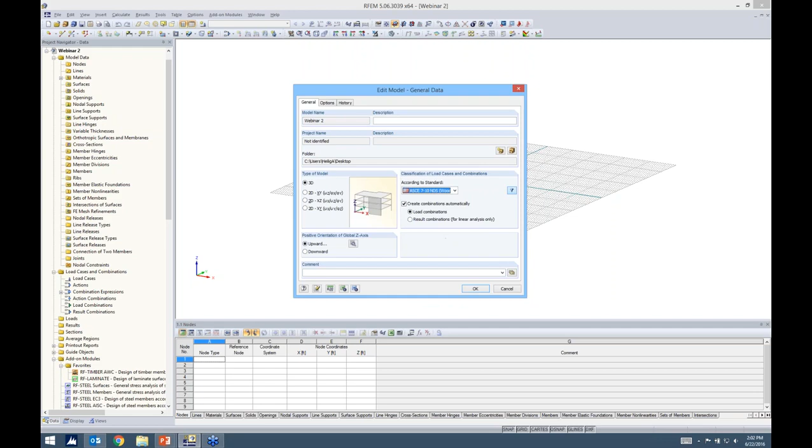So when you launch RFEM, this is the dialog box that you'll receive, and you just simply need to go ahead and give your model a name and define the type of model, 3D, with the orientation of the z-axis upward. For our load combinations, we actually have in here ASCE 7 for 2010, the NDS wood load combinations. I check the checkbox to create these automatically, then we simply click OK.

So some of you are familiar with RFEM, but for those of you who aren't, this essentially is the program. We have the tables for data input as well as our results down here at the bottom. We have our project navigator over here on the left, which can also be used for data input. We have our display tab down here, which is basically what controls everything in our view window here.

We have views, which we'll be using today, and then once we run our results, we should get another tab down here that says results. And then, of course, we have all of our toolbars at the top for our modeling purposes as well.

So we want to begin today with our walls, and typically with walls, we would want to go ahead and model them in this vertical direction. What I find actually easiest is to use line elements to begin with, and up here we just go ahead and choose new line in the toolbar, and you'll hear me say this quite often. We have a lot of AutoCAD-like features, which I think is one of the more powerful capabilities in RFEM.

So not a lot of time will be spent trying to create very complex geometries because we have all these capabilities within the program itself, such as splines, polylines, arcs. So you can see for line options, we have the typical straight line, but we can, of course, choose any one of these. For our application, we'll just go ahead with a single straight line.

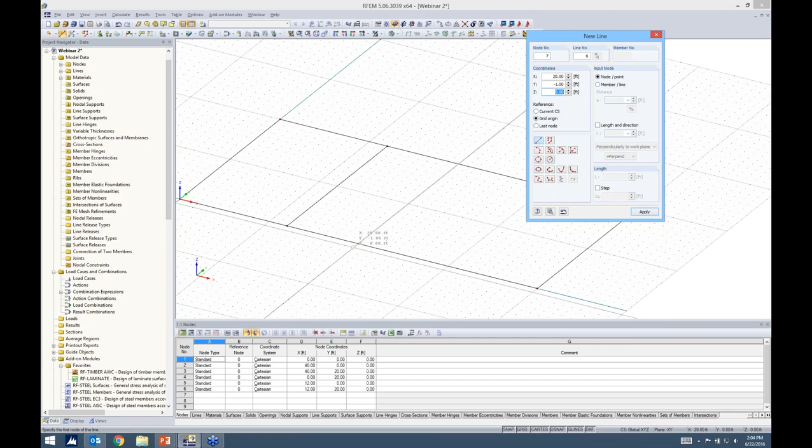Now, all I'm doing is just using my drawing grid to draw a 40 by 20 outline of my building here. And you'll notice that I just snapped to the different points, and I'm going to add an intermediate wall, maybe right here at 12, and one more at 20. So we have nothing more than just these 1D line elements here.

And what I can do is I can just select them, and I can right click, and under line I can go ahead and extrude the line into the surface. Something to note here, these are going to be cross-laminated timber panels. So cross-laminated timber is not available in RFEM. In order to define all of those different layers and properties, we have to use our RF-LAMINATE module, which we'll be spending some time in a little bit later today.

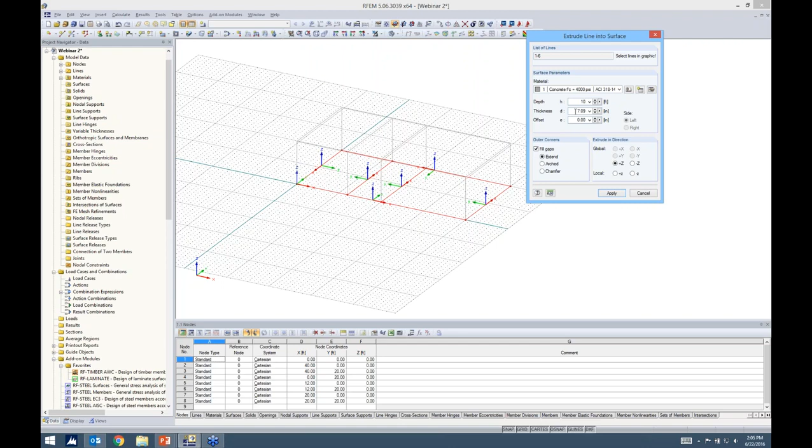So it's worth noting that the material here for our panels doesn't matter. We can just go ahead and choose something very general, such as concrete or steel, because all of this is going to be overwritten later by the add-on module RF-LAMINATE. So for now, concrete is fine. I want a height of 10 feet. The thickness doesn't matter either, that will be overwritten as well. So I hit apply, and now we can see that our walls are quickly generated.

Maybe we want to add some openings in these walls, and for this I'm going to go ahead and change my work plane. You'll notice that work plane is just on this front wall of this structure. Work planes are important because when we continue modeling, the work plane confines exactly where you're drawing your elements, so I don't have to worry about drawing out in space or accidentally drawing on the back wall. I'll be drawing where this work plane is set.

As far as openings, our other toolbar up here has all the different openings. Again, we have the typical rectangular opening, but we have all of these other options. This can be super powerful when you're doing finite element modeling, or maybe you have a structure with some odd geometry for different openings in a slab or a wall. You can see here ellipses, polygons, anything you can think of.

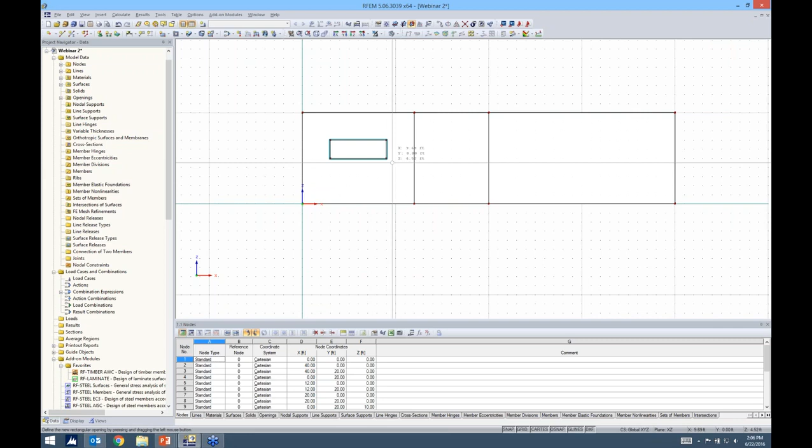For us, we'll go ahead and stick with a rectangular opening, and basically I'm just going to draw some windows here, nothing too complex. Maybe we want to draw a door opening here, and lastly a window over here.

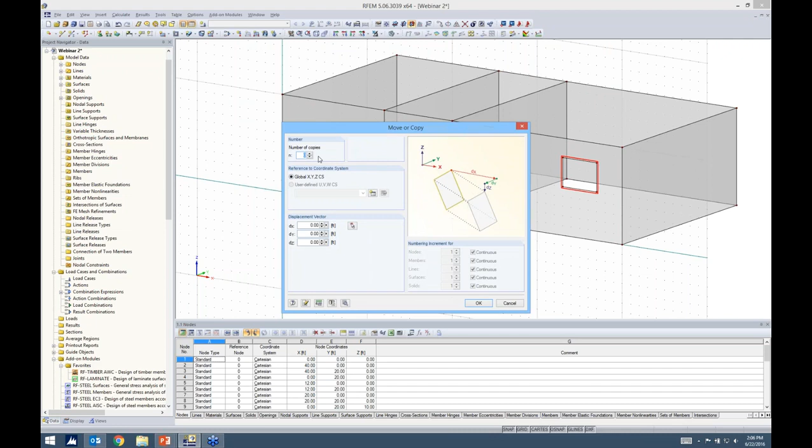Now, as far as the windows for the back wall, I can just go ahead and hold down my control key to select these openings. I'm going to use my move tool, and create one copy and move it back 20 feet in the Y direction. You'll notice I'm going through modeling maybe a little bit quick.

We have plenty of other webinars that have more basic modeling. I really want to get to the CLT and timber design, so that's why it may seem a little bit quick in terms of all the modeling behavior.

Okay, so now that we have this defined, I'm going to go ahead and change my line grid now for my floors. I just simply change the work plane again, and you'll see how quickly I can define my different origins, and now I'm at the top of the structure.

We have this other button up here, and what this does is I can go ahead and select all of the model. Now, instead of a single continuous line that previously existed up here, these are now broken up where the wall panels intersect. The reason for that is now I can go ahead and create a surface by selecting my boundary lines.

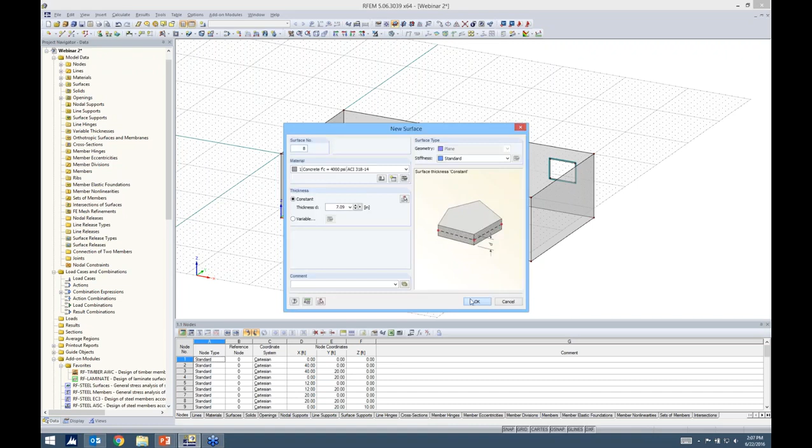Again, the material doesn't matter and the thickness doesn't matter. This is CLT that we'll go ahead and override at a later point. So now all I need to do for my floor elements is select my boundary lines and then do so for the second diaphragm. And we have our first floor.

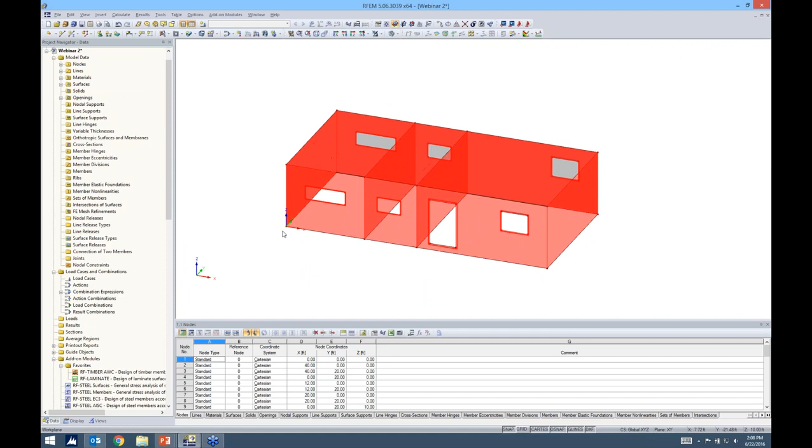Now we want to go ahead and create our second floor. Well, that's just as simple as selecting our walls, and I was careful not to select the floor panels. I hold down my control key and I just drag and drop. Dragging and dropping is a very useful feature in the program, again, to really save on some time for modeling.

Maybe I don't want this opening up here at the top. I can just go ahead and select it and delete it.

Now we want to create a pitch in the roof. For this, I'm going to go ahead and turn my rendering off to only a wireframe model. This way I can go ahead and select all of these lines at the roof level, go ahead and right click. I'm going to go ahead and divide the line by n intermediate nodes, and I'm going to place one intermediate node at all of these lines.

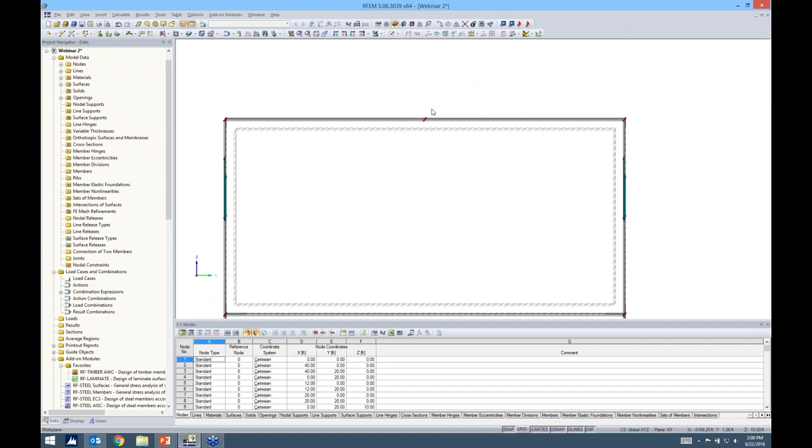Pretty simple. Now what I want to do is go ahead and highlight only these nodes, and I will use our move and copy tool. This time, instead of creating a copy, I'm going to move these particular nodes in the positive Z direction 3 feet. So now you'll see that we have a pitch in the roof.

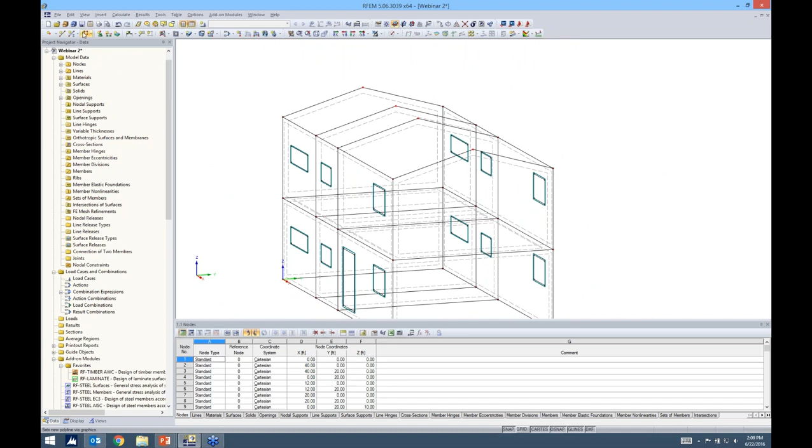Fairly straightforward. So what we want to do now is go ahead and draw our timber members. We go ahead and click on new single member here, and you'll see that the member type is considered a beam. Several other options here, but for this type of application we just want a typical beam member. We want to create a new cross section, and up pops our cross section library. For this I want to choose standardized timber.

Then this dialog box will pop up for all of the different standardized timber sections. We can further filter according to AWC. We also have CSA in here, depending on which type you're exactly looking for.

You can also go ahead and choose a favorites group. I created this favorites group called USA, and I just added a couple shapes that I'm using for today's webinar. Rather than sifting through all of those different shapes, you can create as many favorite groups as you like and add or delete any of these shapes here.

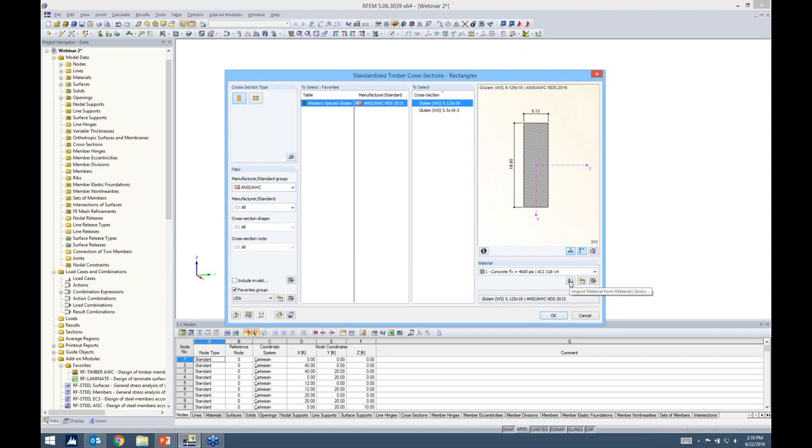Concrete won't suffice for this timber member, so we need to go ahead and define our timber material. For this, I go into my material catalog. Of course, we want the timber filter initially, and then you'll notice that we have all of these further filters.

For our application today, we want to be in North America, because North America contains the AWC materials and the CSA materials. Even for AWC, it's quite an extensive list. You do have the option to search here, but again, I added it to my favorites group. So for this particular member, I'll use a 24F-1.7E for my material. All of the material properties are shown right here, so it's very easy to access.

Now it looks like we have something more like a timber material. I can click on this info about cross-section and get all my cross-sectional properties just at the click of a button.

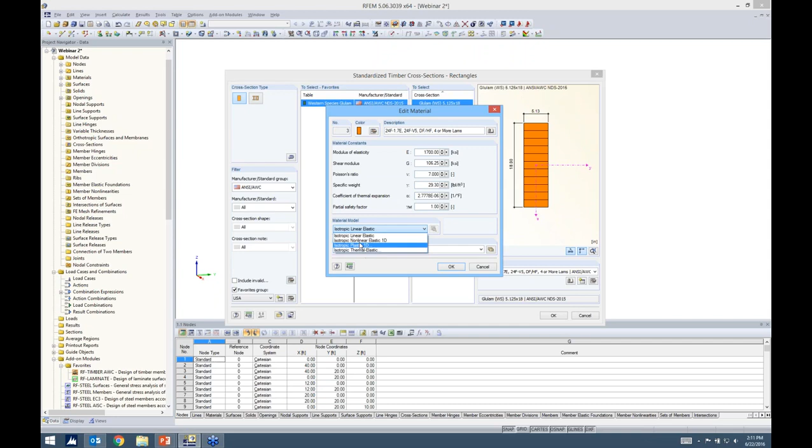Now, one thing to note here: if I go ahead and click on my edit material again and look at my particular material model, this list isn't really as extensive, because I only have a 1D element chosen right here. But I'm going to jump back to the PowerPoint.

All material models available in RFEM are listed here, and technically timber is considered viscoelastic, meaning that the strain rate is dependent on time. But realistically, we can't model viscoelastic behavior in software—it's just very complex. So we will just go ahead and consider it elastic. This is the basic behavior of modeling timber.

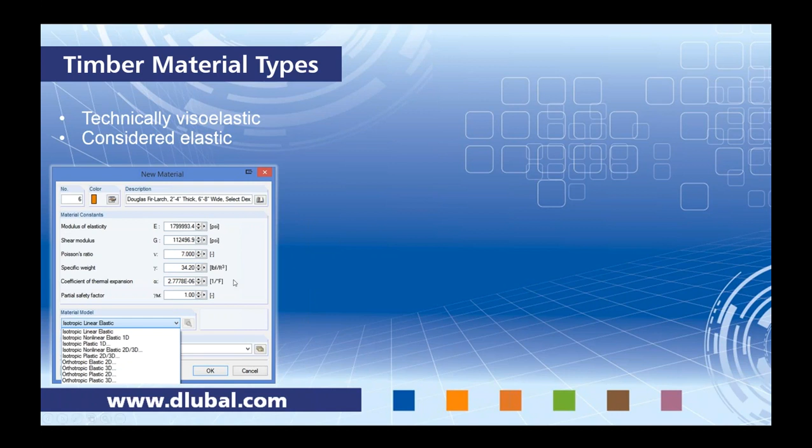However, I want to differentiate the different material models for our different elements. For 1D member types, such as we're modeling right now, we'll use isotropic linear elastic. For 2D surface elements, we're using orthotropic elastic 2D. Most of us know what orthotropic is—it's just where our material properties are different in the X versus the Y direction for each surface element. And lastly, we have the solid model, and for that same concept, except now we have 3 directions for a solid.

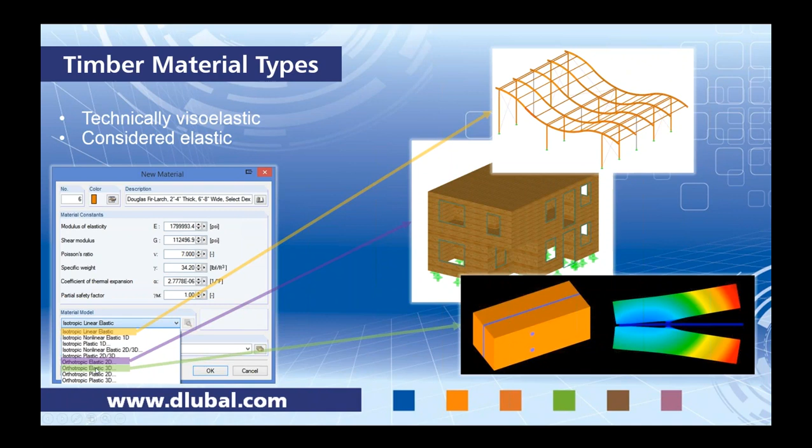Okay, back in RFEM, if I go ahead and click OK—and if you've used RFEM before to model timber, you'll notice this error message that pops up every time. This error message is saying you must have incorrectly defined your material: Poisson's ratio is greater than 0.5.

The calculation is possible, but only E and G are applied. Is this okay? I really want to explain what's going on here, because some of us may just click yes and not really know the logic behind why this program is throwing up the error.

So timber is actually anisotropic—the properties change with the direction along the object. This is pretty apparent for timber. However, in the program, for 1D members, we only have the option for isotropic, and isotropic materials use this equation to calculate the Poisson's ratio.

It's modulus of elasticity over 2 times the shear modulus, minus 1. So all the program knows is to take E and G, relate it to this equation, and go ahead and calculate Poisson's ratio. Well, 7.0 is extremely high, so that's why the program's flagging it, and it tells us only E and G will be applied. Is this okay? And the answer is yes, this is fine.

The reason why is because if we look at the stiffness matrix for a 1D member, Poisson's ratio is irrelevant—you won't see Poisson's ratio referred to anywhere within this stiffness matrix. So the fact that only E and G are applied, which obviously is present throughout this matrix, that's fine. Not using Poisson's ratio is not a big deal.

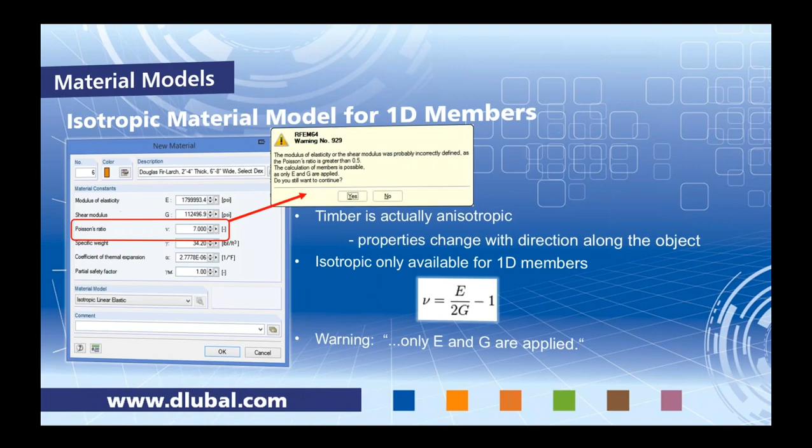Now E, G, and Poisson's ratio are fully independent, unlike isotropic. Back a couple slides when I showed you this equation, E over 2G minus 1, well this is actually not applicable for orthotropic 2D surfaces.

We do have a relationship with Poisson's ratio and the modulus of elasticity, and there are equations to approximate Poisson's ratio, but again, timber that's cut down on the East Coast and the exact same species on the West Coast will have a different Poisson's ratio.

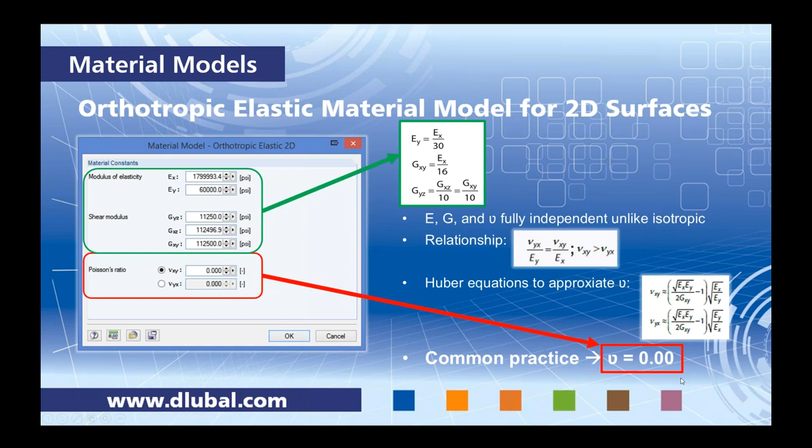So there's really no way to get that exact number. Therefore, it's common practice to just use Poisson's ratio equal to 0. The program is set up to default to 0, so that's why we use 0.

GXY and GXZ, these are equal. This makes sense, they're running parallel to the grain. No matter which way I flip this member, I should have the same shear modulus.

Okay, so jumping back into RFEM, here's this error. We can go ahead and click yes. So that's kind of where that's coming from, and then I can click OK again.

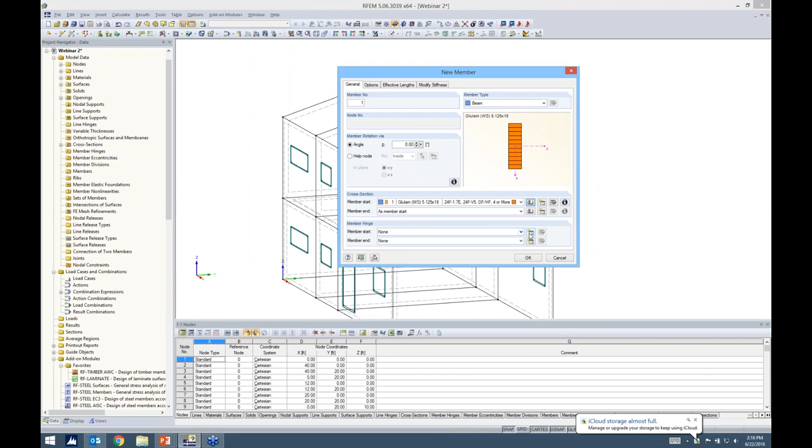Something to also note, we want to go ahead and apply some member hinges to this end. I want to go ahead and create a new member hinge, and the default here is to go ahead and create a pinned release to release rotation in the local Y and Z axes. There's a nice picture here if you don't understand exactly how the local axes are laid out.

Also, you have the ability to really get into nonlinearities if you choose, such as partial activity. You can define your own diagram, plastic hinges, but you'll notice everything is pretty well hidden if you just want to keep it as a typical pinned or fixed release. So these nonlinearities are possible, but yet it's not overwhelming that you have to sift through all this information just to get your typical release here.

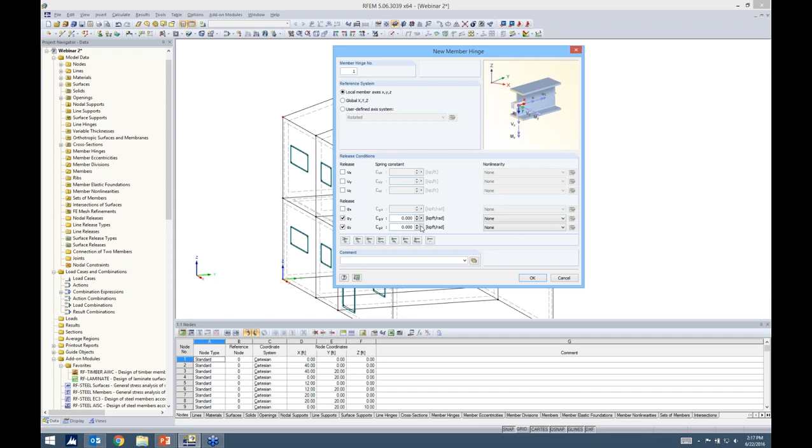So for the member start and member end, I'll use a pinned release. Here I'm just going to go ahead and model this member between each of the walls. The reason why I'm doing it between each of the walls, I want the pin connection at each wall. I can go ahead and choose the rendered view again, and we can see how that timber member is applied to the roof.

Now the next thing that we want to do is to go ahead and draw in our rafters, and we'll go ahead and create a new member again with a new cross section, this time a parametric timber, and all I need to do is to type in 4x8. Now, I don't want this same material.

I'll go ahead in my material library. Under my favorites group, I already have Douglas fir larch put in there. I click OK. I click OK again.

Now to address the member hinges. I think where the first rafter joins this larger ridge member, I want a typical pinned release. That's fine. However, for the member end where we're framing into this CLT wall, I'm going to define a scissor release. And what exactly is a scissor release?

Well, scissor release is where we have 4 members framing in together here at this single node. However, the continuous members, such as 1 and 2, will go ahead and transfer moment between each other. Same with 3 and 4, but we don't want to transfer moment to the perpendicular member. We only want to transfer axial and shear forces.

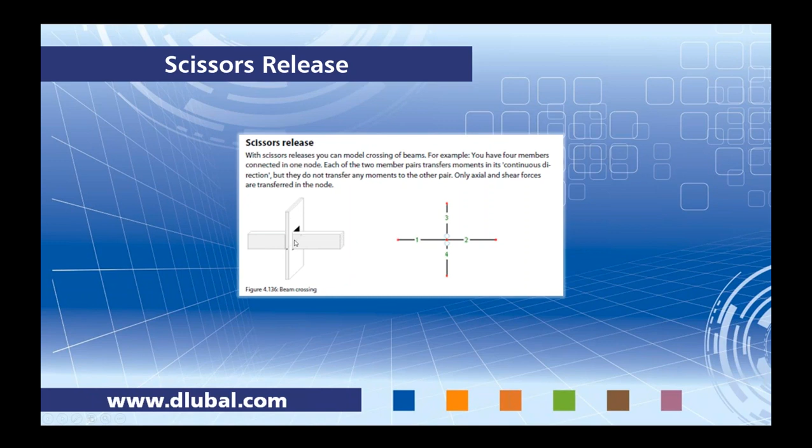So I think that this is best illustrated, and by the way, this was just taken from our manual. This is best illustrated with a beam or our rafter passing through the wall. You can see that moments will certainly be transferred for the items considered individually, but considered together, we don't want to transfer a moment to each other.

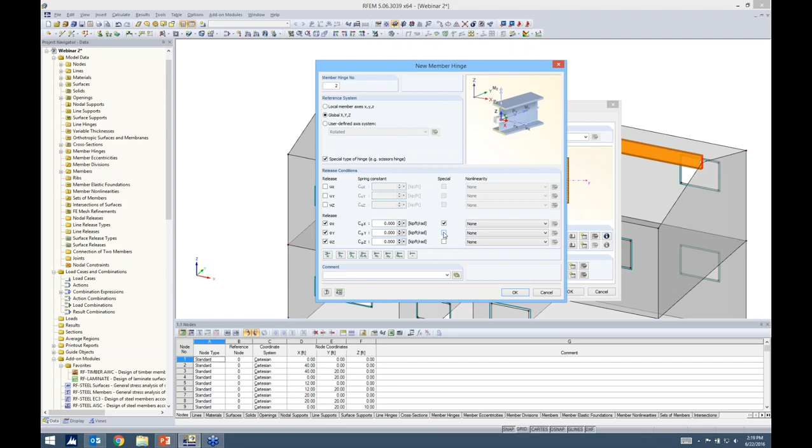So we will go ahead and go back into the program, and under the member hinge, we'll create a new member hinge. Here, instead of the local X, Y, and Z axes, I'm going to create a global X, Y, and Z. Then you'll notice that this option pops up here for a special type of hinge. With this, I can now go ahead and check this checkbox for special and release all rotations.

If I click OK, you'll notice that the program denotes this as a little bit different from a typical release by putting an S on it for special. So I click OK, and then I just need to go ahead and draw in my first rafter.

The other thing I'm going to do is use the drag and drop by holding down my control key to extend the member. I want to adjust my member releases here for the second one.

I also want a scissor release at this location, so my member start, because I've already defined it, is available in this drop-down. Member end doesn't matter, because I'm going to divide this member by a certain distance.

You'll also notice when I'm in this divide dialog box, it's nice because I don't have to guess what's the member start and the member end. The program throws up this little black arrow here for all members showing you the start and the end, or the I and the J ends.

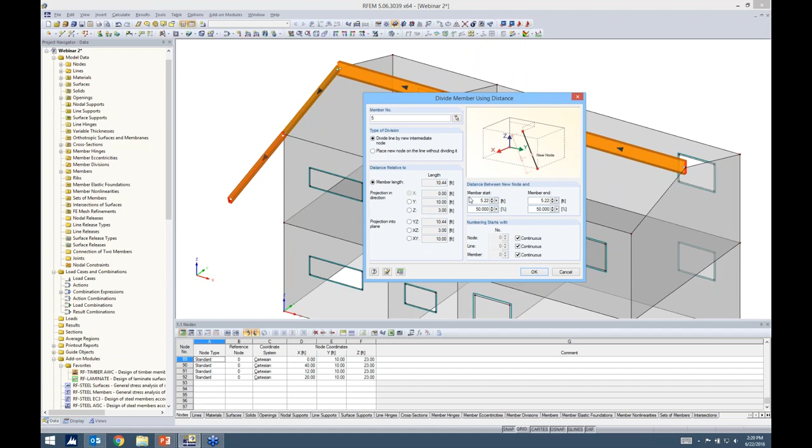So the member start, I'm going to go ahead and divide it 2 feet from the member start. I click OK, and now I have 2 separate members. I'm just going to go ahead and delete these.

As far as the scissor hinge, I do need to move it over slightly because I'm at this intersection of 2 walls, and the program will give me an error just because it's a very odd connection to be at this particular intersection. So I'm just going to select both of them by holding down my control key.

I'm going to use my move tool again, and in the X direction, 0.5 feet. Oh, sorry, let me undo that. I also had the Z direction defined as 3, so we'll change that back to 0.

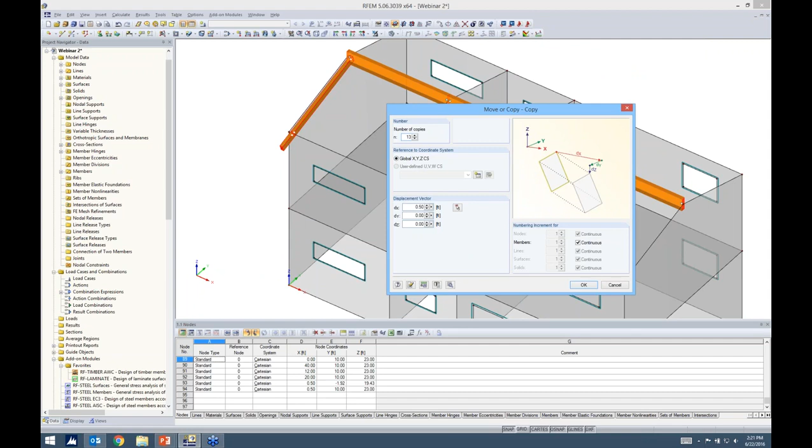As far as the rest of the members, it's easy enough using our move and copy tool. I'm going to create 13 copies at 3 feet on center. I click OK. All the hinges, special types of hinges are there, and my spacing is correct, so everything looks good.

Now I need to do the exact same thing for the other side. I could go through that whole process again, or I really want to utilize the tools in RFEM.

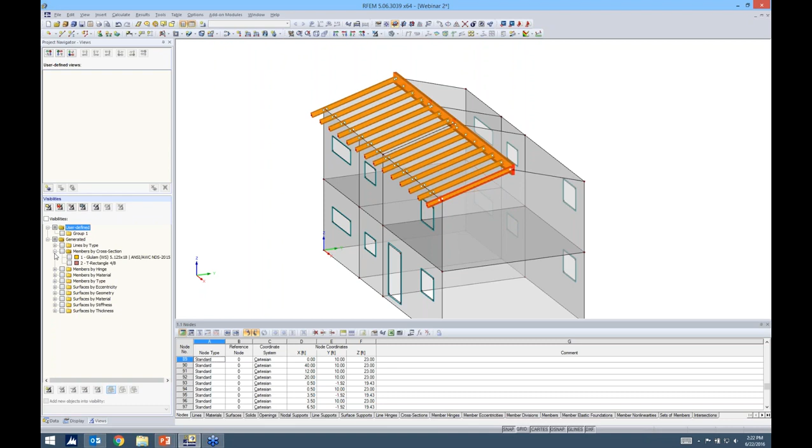Under this Views tab down here, you'll see all of these default options, basically just to select different objects in the view window. For example, there's an option here, members by cross-section, so all my different members by the different cross-sections would be listed here.

For me, I just want to select my 4x8s. You'll notice that I can't really select anything else in the model, which is exactly what I wanted.

Now I can highlight all of these, and we have the mirror tool, just like in AutoCAD. I'm going to create a copy, and it's asking me which plane I want to mirror through, and I want to mirror through the XZ plane.

I just simply need to choose a point at which it will be doing the mirroring, so I choose any one of these top points. I click OK, and now I have my roof. So again, a lot of features to quickly model in here.

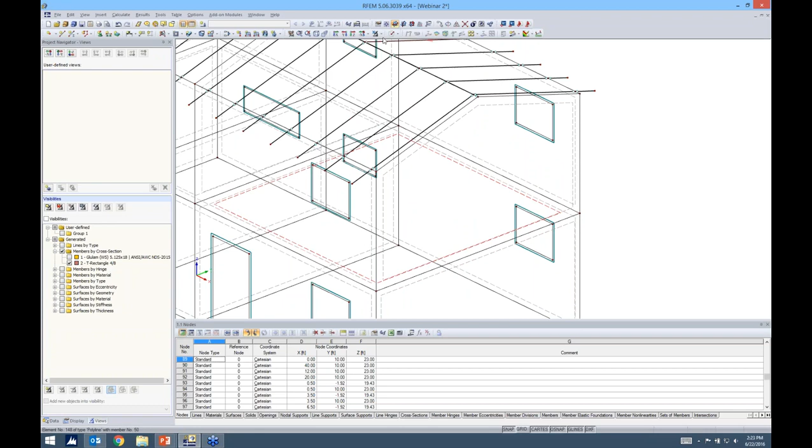Okay, lastly for this, one more thing. Let me turn this into wire view. If I zoom in and select this floor panel here and choose visibility by selected objects, I'm really only looking at this single floor panel.

Well, this floor panel is pretty long, and maybe I want to add in some type of beam along here. That's fairly easy to do, but I really want to drop it down so the eccentricity is included for the surface thickness as well as half the beam depth.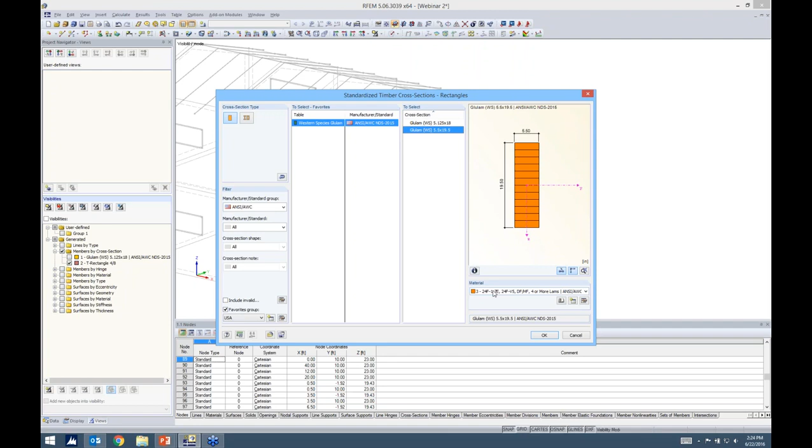With that, I can go ahead and create a new member, just like what we've seen before, create a new cross-section. I'll go into standardized timber here, and I'm going to choose my other Glulam that was in my favorites list. Materials already defined, so that's perfectly okay to leave it the same as the other one. As far as my member end releases, I just want a typical pinned release.

Now, there's another option here called options. Under this options tab, we have member eccentricity. If I go ahead and create a new member eccentricity, you'll see that I can either choose an eccentricity by defining the length, either at the I or the J end, or I can do a relative offset.

This is really user-friendly. I want to note, though, that when you're first in this and trying to apply these different eccentricities, it could take a few tries before you get exactly what you want because the local axis is very important. Just because I've been in RFEM enough, I know that my local axes are opposite of what is shown here. So realistically, instead of choosing the top of the beam, I would choose the bottom here because I know my local axes in here will be modeled with the local z-axis up.

Now it's asking what you want to offset it by. I can choose either a member or a surface. So if I choose this surface and graphically select the surface, again, I know my local axes are opposite here, so I actually want to select the top. I'll go ahead and click OK, then click OK again, and now I can go ahead and model this particular beam.

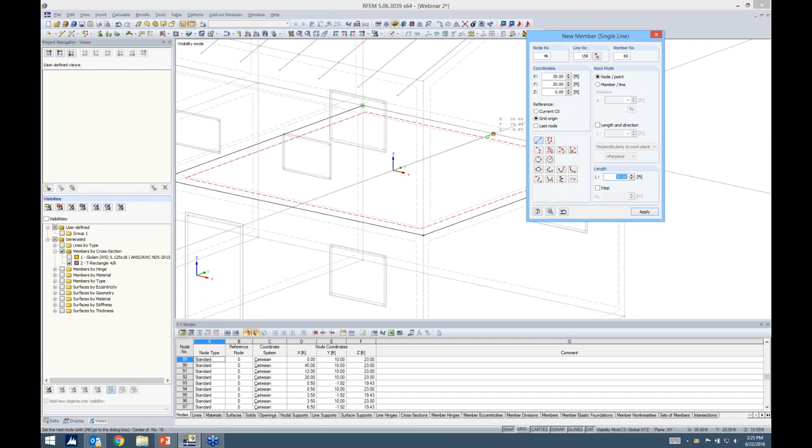You'll notice too that I don't need to model in extra nodes because of the CAD-like capabilities. My centerline snap point pops up, and I can choose the other centerline. You'll also see a perpendicular line, so it's kind of nice in the sense that I don't really need to worry about drawing in an extra node there.

I can go ahead and render it to show exactly how this beam was dropped down. You can see the rigid links that were created, and these rigid links were created based on half the depth of the beam as well as the surface thickness.

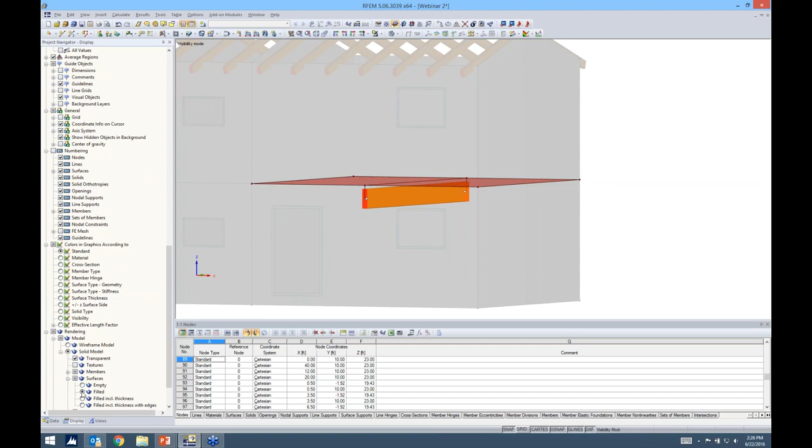I can also go into my display down here in my project navigator, and like I said, this controls everything we're seeing here. I just want to show you that you can go ahead and render these surfaces to filled so you can really see how this beam is dropped below that particular panel. Okay, I will go ahead and cancel my visibility mode here.

The last thing that we want to do is go ahead and add some line supports here. Line supports can be applied, let's say, to the bottom of these walls. Default, hinged and rigid, pretty self-explanatory.

If I create a new support, again just like member end releases, you really have the ability to dive into these nonlinearities. If you have friction, partial activity, sliding—all of these are possible with these support reactions. We're not going to get into this today, we'll keep it as a linear support, but just know that it is an option.

So for us, we'll just keep it as a typical hinged support, and we'll apply it to all the bottom of the structure. Okay, so our modeling is essentially complete for the structure. Now I want to go ahead and quickly add in some loads.

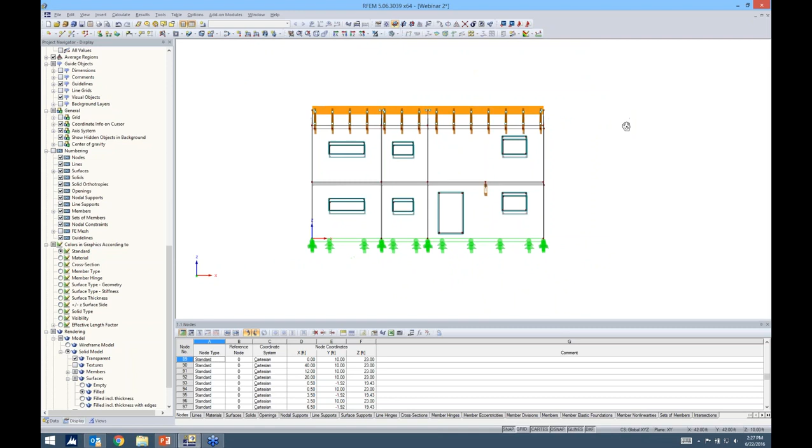For this, I'm going to go ahead and create some new load cases, and that's just opening up our load cases and combinations dialog box. So the first load case will be dead, and we want to go ahead and keep the action category as dead, and you'll notice self-weight is activated for it.

I'll create another one and call this one live, and we'll assign it to live load. We need to pay careful attention to the action category because this is how the program assigns these load cases to the ASCE load combinations. If you incorrectly define an action category, you're going to get the wrong load factor. So keep in mind that these are important when you are assigning your load cases.

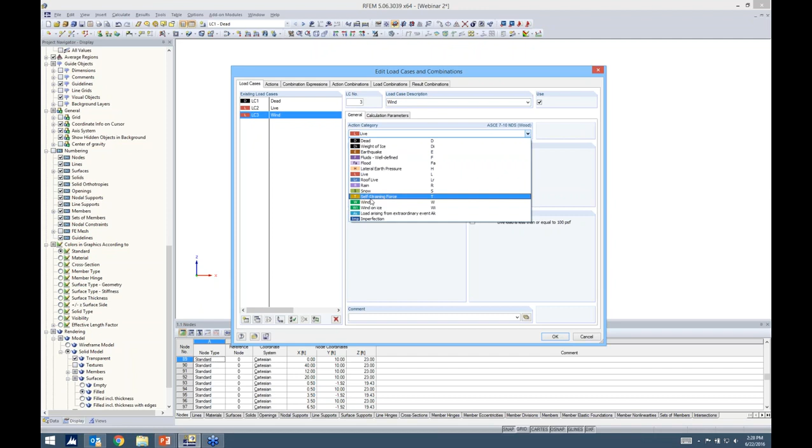We'll go ahead and assign wind here, and we'll assign it to wind. And lastly, we will assign snow to snow.

Okay, so I can click OK out of here, and you'll notice that when I'm looking at my drop-down box now, which previously was empty, I now have all of my load cases, and the program went ahead and automatically created all of my load combinations according to ASD and LRFD.

For now, when you're applying loads, you want to make sure that this is set on the correct load case that you want the loads applied to. So I think what's easiest here is to go ahead and highlight our floors and make this visibility based on the selected objects.

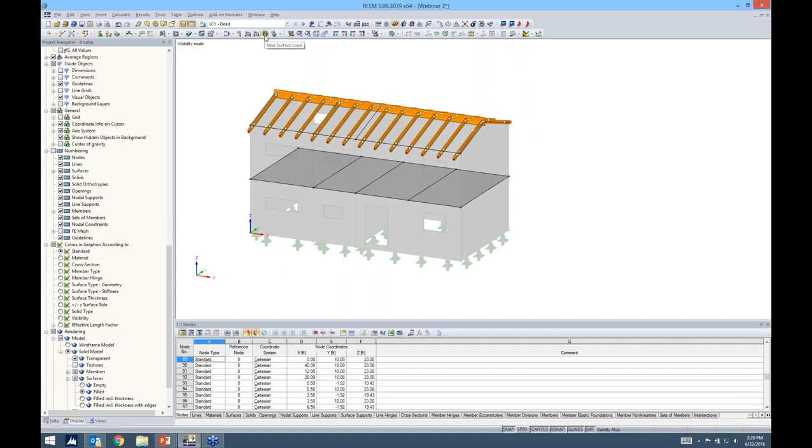Then I can go ahead and just quickly add surface loads to my first floor. I just go to new surface load, and you'll notice here that, again, you have the options to really get into depth for your surface loads. For us, we're just going to keep it as a typical force uniform. And as I scroll through these different load directions, this little picture updates here, which is nice. So you can see exactly how you're applying it in your model.

For us, we will just go ahead and stick with the ZL direction in the negative direction with our magnitude at -0.1. I click OK, and it's as easy as clicking on the surfaces. Now, for my members up at the top, I want to use our tools, generate loads from area loads on members via plane. Again, we can scroll through these different options. I'm going to stick with the typical ZL.

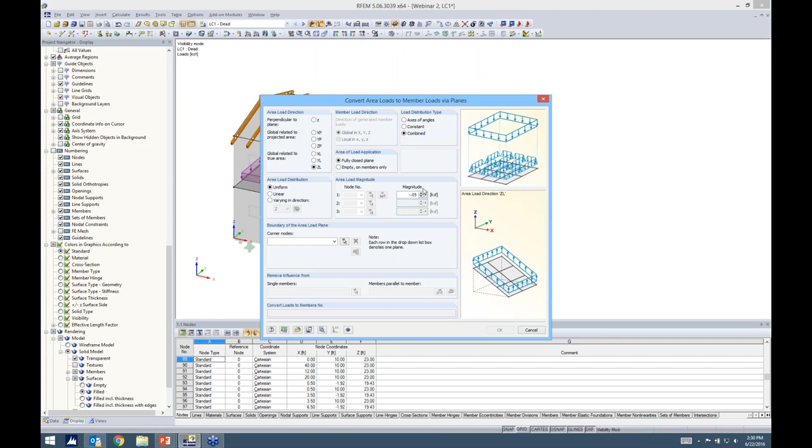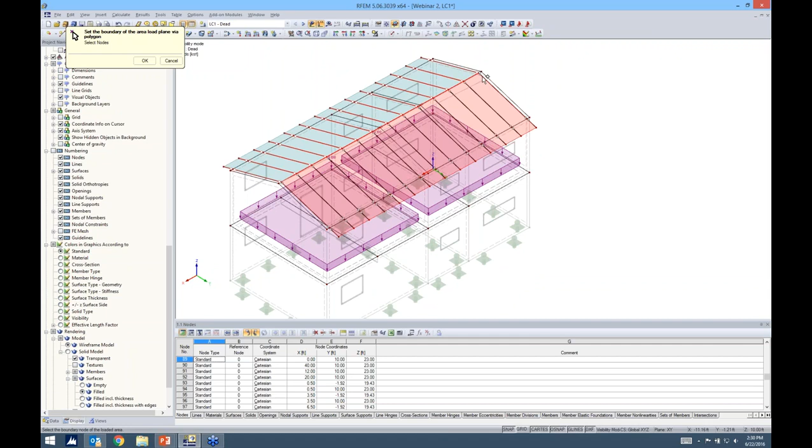And what this is going to do is we're going to apply an area load, and it will actually distribute the line loads based on tributary area to all the different members. Now my magnitude will be -0.05. The program's asking me, okay, well, where should I apply it? And I need to give it some area loads. I can change this back to my wireframe, and I'm going to select first the one side of the structure, and I'm going to go ahead and select the other side as well. So this will just be taken into consideration when the program is applying this dead load to the roof members.

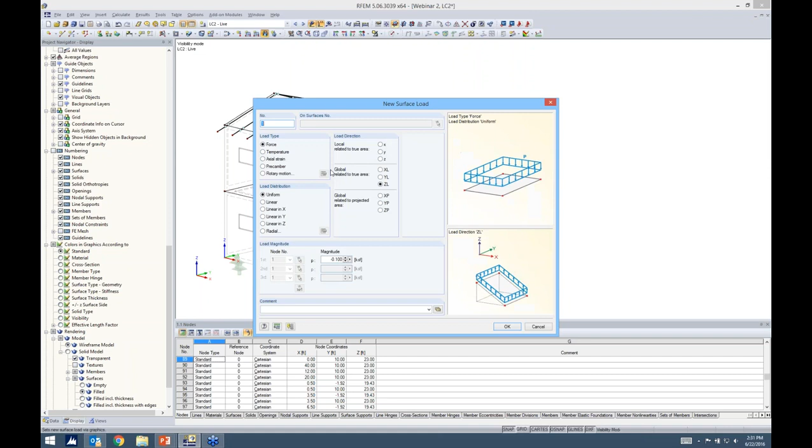Now, quickly going through live load, same thing. We'll just apply a surface load in the ZL direction, but our magnitude will be a little bit less. And we can just go ahead and apply it to these two surfaces here. Now, wind is obviously a little bit different. We could technically do some calculations according to ASCE. And just to let you guys know, we do have the ASCE load generator for wind loads in our internal version now. So I'm hoping that that will be released fairly soon.

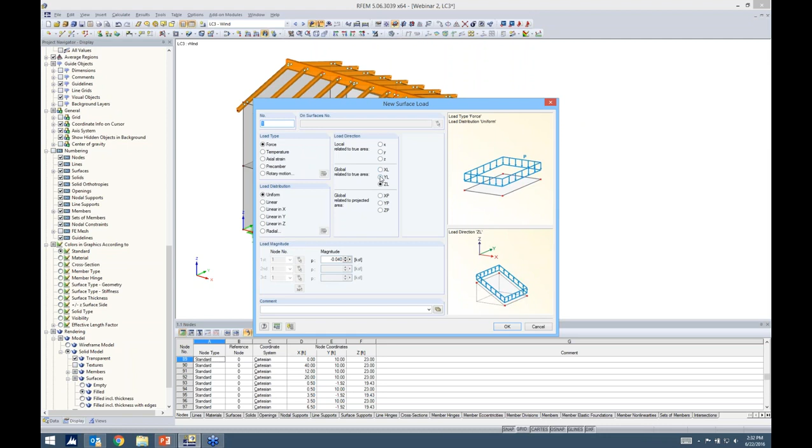For today's sake of time, I'm just going to apply a lateral surface load. I'm going to apply it in the Y direction with a magnitude of 0.04. And all I need to do is click on my surfaces. You'll notice my openings were taken into account. Maybe later I decide, okay, well, I don't want this opening. Well, if I delete it, the load is automatically filled in that particular opening. So everything is very automated in the program, which is nice for a lot of the changes.

Now, lastly, we have snow load, and for this, I do want to utilize our load generator from snow loads for a duopitch roof for ASCE. For this application, I think this is nice because if you're used to snow loads according to ASCE, all of these factors will look very familiar. If by chance you're not sure on a factor, if you click this info button, these are all the tables that are taken directly from the code. So it's nice that you don't necessarily have to flip to the code in order to get some of these factors.

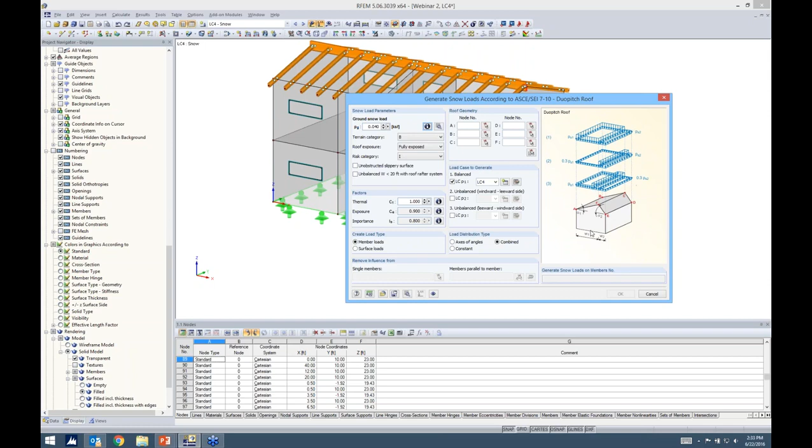The same with the ground snow load. We actually incorporated this map here, and we can double click on, let's say, our structures in South Dakota, and it will automatically come up with our ground snow load. The roof geometry needs to be defined, and one important thing to note here, you can't just click all over to create your roof geometry. You really do need to follow these same guidelines as what this little window is showing you. So with that, I can easily just go ahead and choose my roof geometry based on my rafters here.

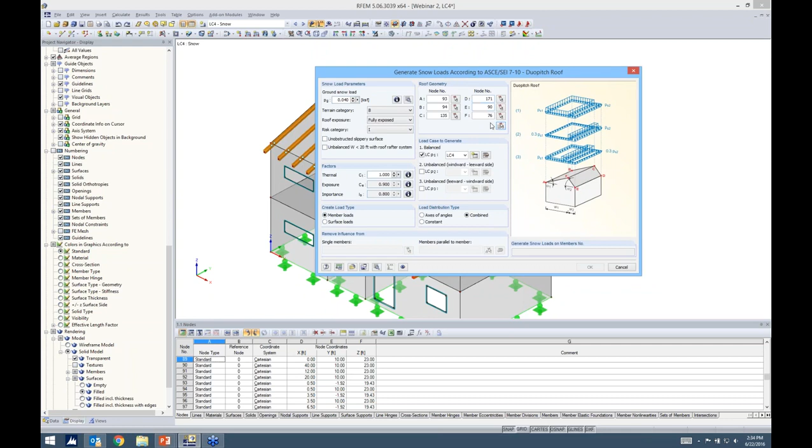And the program jumps back into this. Now I'm just going to do a balanced load case, and you'll notice it automatically assigned it to our snow load. If I go ahead and click... sorry, for some reason I must not have selected my roof area load correctly. Let's try that over again. Okay, well, regardless, we can go ahead and apply the snow load here.

If I go ahead and generate my loads again, I think there might have been an issue with the load generator in terms of my roof geometry. So for this, I can actually go ahead and select my options again, but this time I'm going to turn it into wireframe to see if that works a little bit better. Maybe I was not selecting a proper node.

Okay, much better. Now, that's a good point to make - if you don't correctly define this roof geometry, this OK button will be grayed out. The program's smart enough to know that something's slightly wrong, so you do need to address something in your data here. For me, I must have clicked on a wrong node someplace. We can exclude the members parallel to member 4 again, and I click OK.

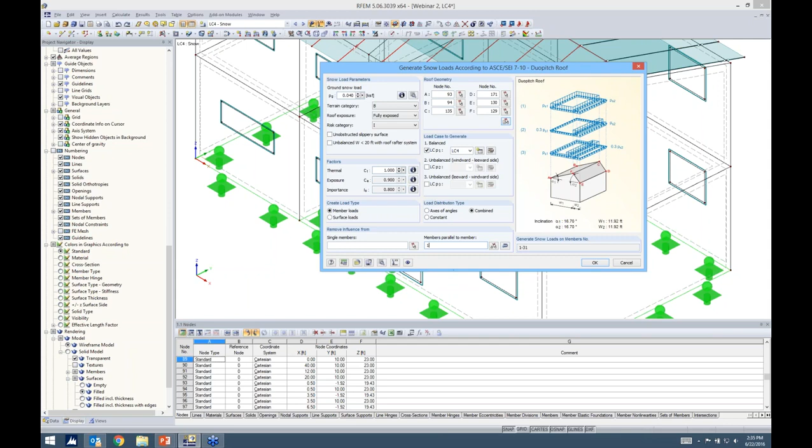Up pops my calculations for the ASCE, and then you can see here that, again, we can right-click and display separately, and we get a nice layout of how the load is being applied to all those different members.

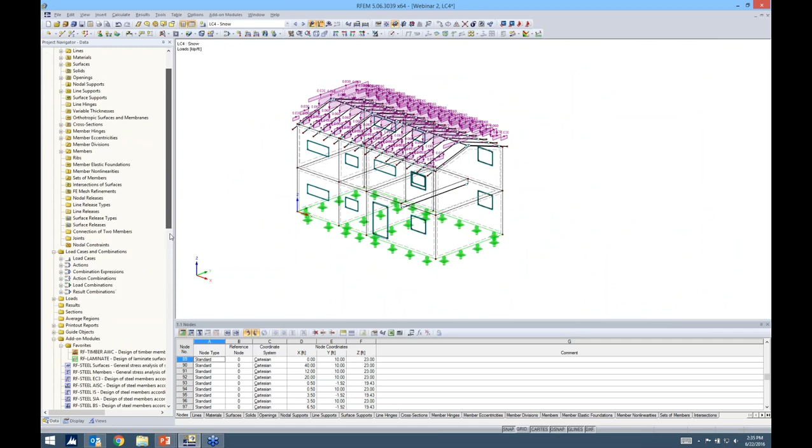Okay, so now that we have all that, we can actually jump into the laminate module. So RF laminate here. I want to go back to the PowerPoint to describe what we're doing in RF laminate.

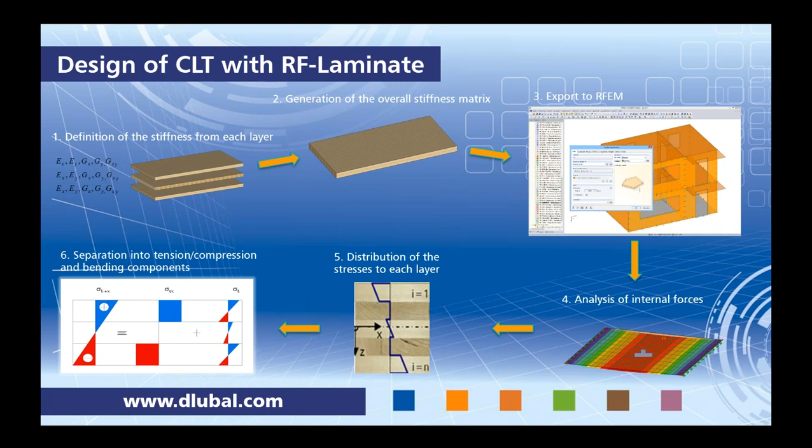Maybe more graphically, you can see the stress distribution throughout the depth of a cross-laminated timber panel. It would look something similar to this. Then for each stress, we're actually going to go ahead and separate it into tension, compression, and bending components. Then we take those stresses and compare them to what the code's giving us for our limit stresses, and then we're going to get a code check. So essentially, that's how RF laminate is working within the program.

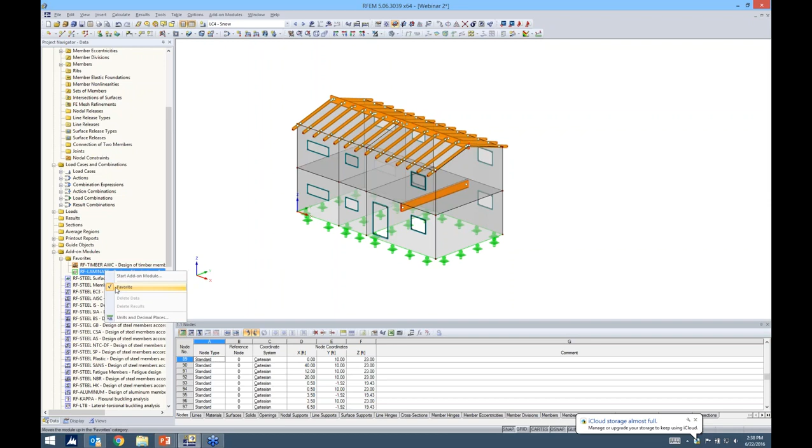So you can see here that I'll go ahead and go back to my rendered view, and I have a multitude of add-on modules, but I added the ones I use most often. You can just right-click and check favorite to move it up to the top, which is nice. So I'm launching RF laminate. When I say add-on module, this is the add-on module - it looks like another dialog box.

So I don't have to remodel anything, I don't need to worry about linking data together - everything is all within RFEM. And the other thing for these add-on modules, you just want to work from top to bottom with the input data, which is given here on the left. So just work down this list.

So the first thing it's asking us is what surfaces do we want to design? I can check this checkbox for all, so all surfaces are now selected in there. Now for standard, we want to choose the NDS-2015, and you'll notice we have both ASD and LRFD.

I'll go with ASD, therefore I want to select my ASD load combinations from ASCE. So here I can just select the ASD load combinations, and these are what I'm going to use for my design. Serviceability is if you want to go ahead and do a serviceability check in the program, and under the standard, you can set here your limiting deflections. Today we're not going to do this, but just to note that that is there.

Material characteristics. So the first thing we want to do is define the first composition. I'm going to title this one walls.

You can go into your material library for timber and add in all the different particular material types you'd like, give it a thickness and a direction. But we also have this option: import layers from library.

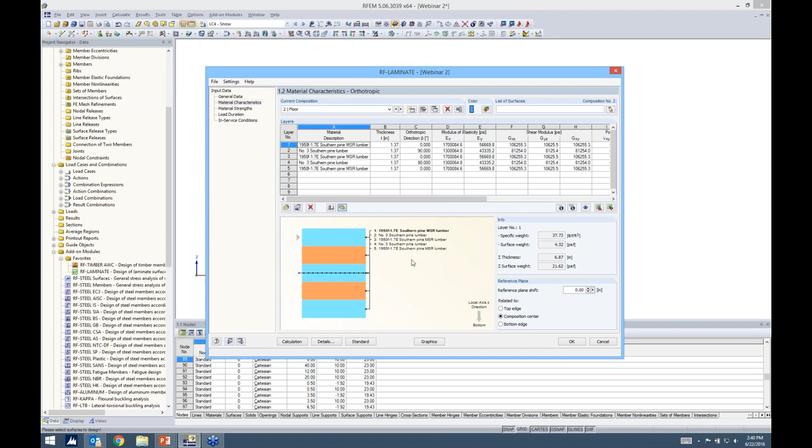The other thing to note here, if we go back to our walls and click on this button, Edit Composition Details, do we want to consider coupling, and do we want to consider that the cross-laminated timber is without glue at the narrow side? So what exactly does this mean?

Most likely the different layers will be glued together, so for our case we're going to consider shear coupling. Now, consideration of edge bonding, or are the boards glued at the narrow side?

When I go back to RFEM, you can see here I'm already considering coupling. If I check this cross-laminated timber without glue box, you'll notice my in-plane shear stiffness will now be reduced by this coefficient 0.25. That's exactly what I just mentioned in the PowerPoint. We don't have this scenario here, so we'll just leave this alone.

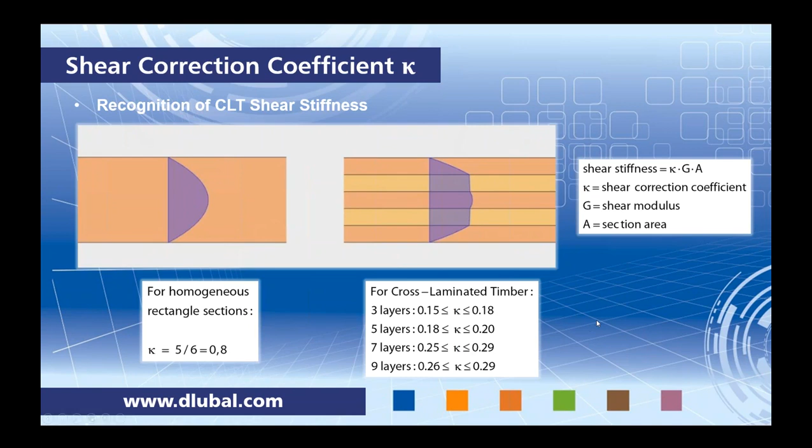For our shear stiffness, we do need to somehow determine that, and it is the shear correction coefficient times G times A. Now what is this kappa, though, for cross-laminated timber? There are several suggestions from research to use these ranges for 3, 5, 7, 9 layers. The question is, what if we get to a point where we have 10 layers? Or what if we really want an exact coefficient within this range but don't know where exactly we fall? Well, the good news is the program does this automatically.

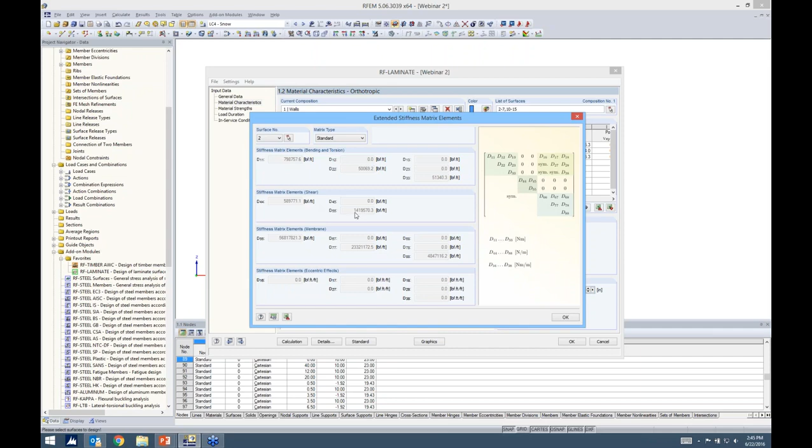Going back into the program, if I click on this info button here, I can open up my stiffness matrix for this particular composition, and I can see D44 and D55 here. These are the values you'd want to use. So this option here is something you probably won't be changing unless you really know what you're doing, because the program is automatically calculating this for you. Just keep that in mind when you're in these details options.

Okay, so another thing to keep in mind, this orthotropic direction. Orthotropic direction beta is the angle from the local x-axis. We need to pay careful attention to this, and I can't stress this enough because I made this mistake preparing for the webinar as well. If we want to go ahead and orient these outer layers, because these are our strong layers, we want them to be, of course, in the vertical direction in our model.

So if I click OK here, oh, let me go back to my floor. I forgot to assign my surfaces to my floor. And I click OK. Now I look at my model, and you'll notice now they're blue. I double click on them. They're not concrete anymore, they're now RF laminate. In order to edit them, you need to go back into the laminate module.

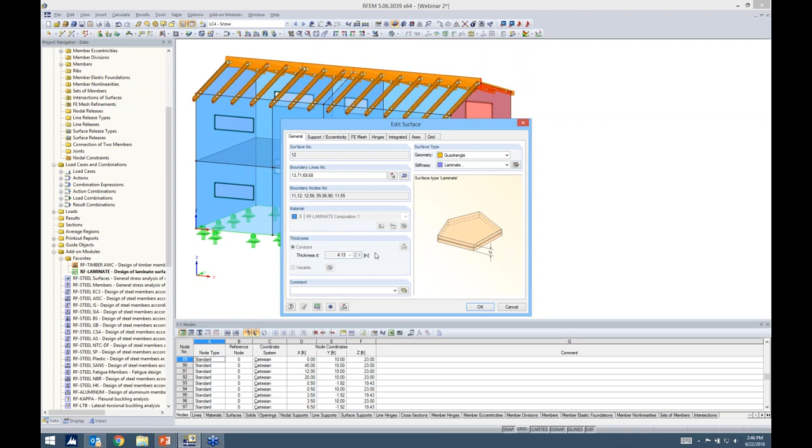I can right click and go ahead and display my local axes. Notice that all of my local axes are in the horizontal direction. This is not good. We want these strong layers to be oriented in the vertical direction to take those gravity loads. So I could sit here and change the orientation of all of these surfaces, but better yet, we have a quick feature in the program.

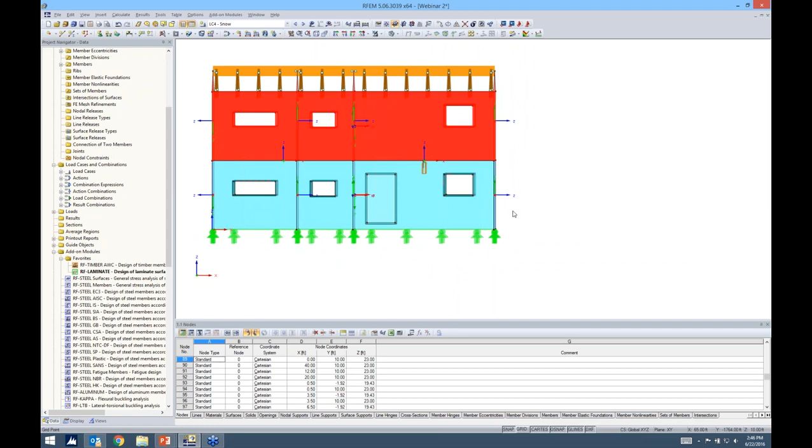If I just go ahead and select all of my wall panels, right click and go to Surface Edit, there's an option here called Axes. Under Axes, there's the option Axis here, and I can actually set all of my local x-axes parallel to a line that I choose in the model. I'm just going to choose this vertical line here, and click OK. Now you'll notice that all of my local axes are oriented in the vertical direction.

These ones come from the floor panels, so we don't need to worry about that. Again, very important detail. Otherwise, you risk your results being inaccurate because you haven't oriented the direction of the layers correctly.

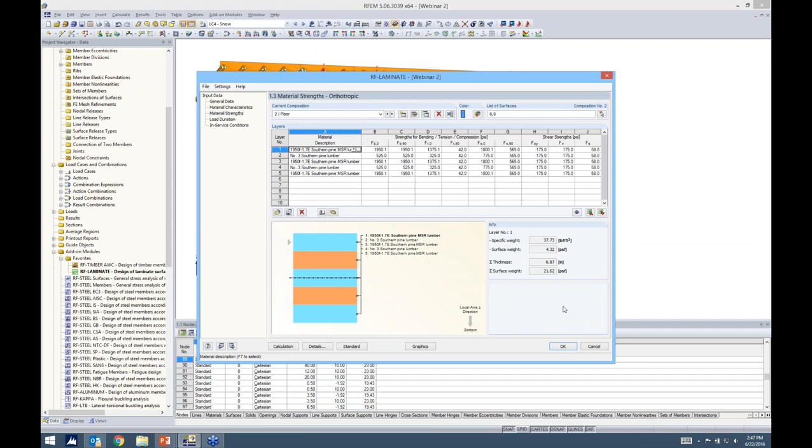Okay, so going back into RF laminate, we can continue moving down here. Actually, one more thing I forgot to do. Along with the orientation of the axes, you'll notice here that we have our walls framing into each other, and this is a rigid connection now. For cross-laminated timber, we probably won't have a rigid connection, almost guaranteed. So how do we address that? The answer is with line hinges in the program.

So every surface is just composed of line elements on the outside. If I go to Insert, Model Data, and Line Hinges, I can go ahead and assign a line hinge graphically. I need to give a new definition for a line hinge. With the screws and cross-laminated timber panels coming together, I'm probably not going to have any resistance for rotation about that joint, the local x-axis. So I'll leave this as released.

Now, as far as translation along the joint, we'll probably have a little bit of slippage there, so maybe I can define a spring stiffness coefficient of 40 kips per foot squared. I go ahead and click OK. I'm actually going to use this option here that says select surfaces and automatically assign the lines. I think it's quickest.

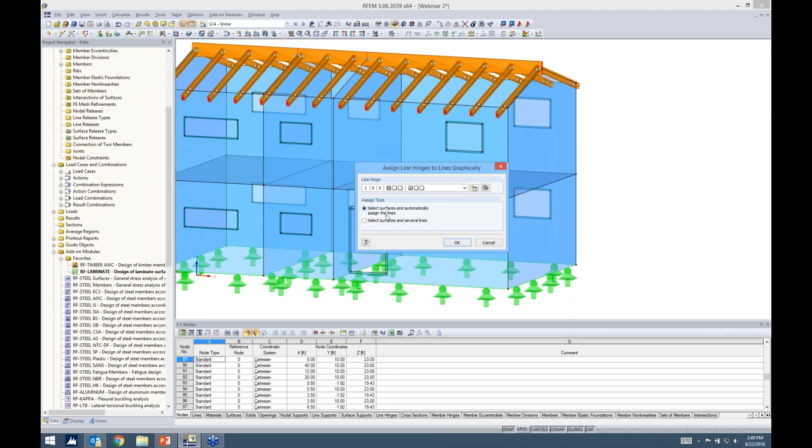I click OK, and then here what I can do is I can just select all of my walls, and you'll notice they're all listed here. I click OK, and now I have all of my line hinges assigned. I can see these line hinges, double click them, edit them individually. It's a nice feature to use that tool. However, there's one thing that we do need to clean up.

Just like the example where you have two members framing into each other and you cannot define the member ends both as pinned, you'll get an instability. You need to have at least one rigid member, and the other member framing into it can be defined as pinned, but if you define them both, we get issues within the program.

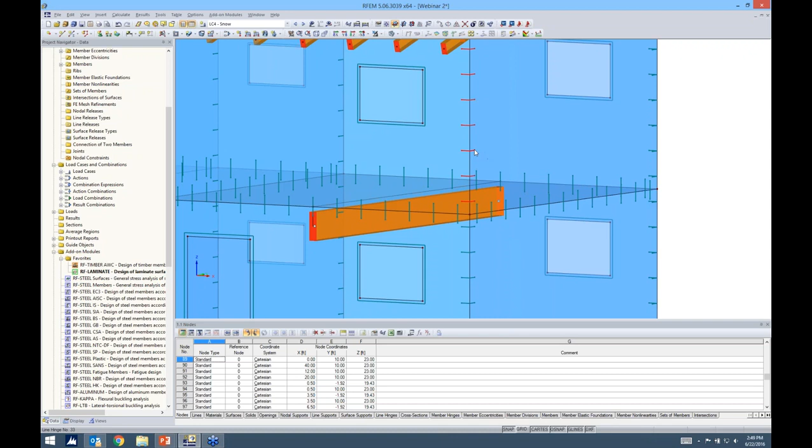Same for wall panels. We don't want to define two wall panels framing together both with a line hinge. We actually want to delete one of those. So I'm just going to hold down my control button, select them graphically, and click delete. Now let me go ahead and do so on the other side, again holding down control, and click delete.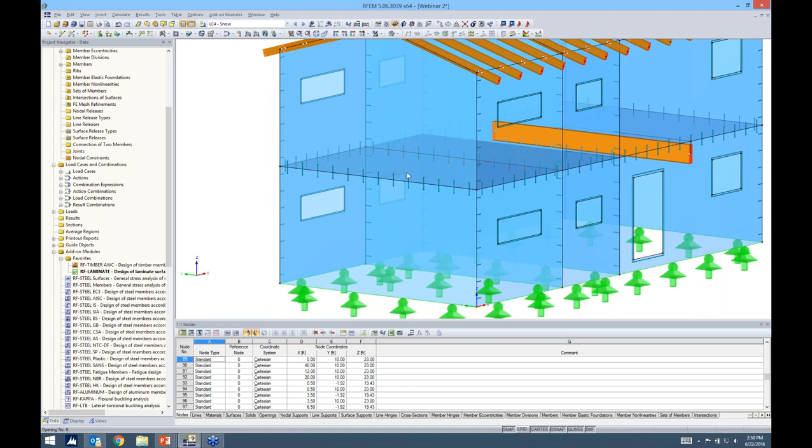Now you might ask yourself, well, I see two line hinges here, but the reason why is because my floor panel is also framing in here, which doesn't have a line hinge. Therefore, we're stable for this particular intersection.

The last thing I want to do is add one more line hinge to my floor. So if I create my visibility by selected objects, I go to Insert, Model Data, Line Hinges Graphically. This time I'm going to use the same definition, selecting the surface and then the line, and click OK. You'll notice that here I have another line hinge, and I still have my one rigid surface framing in right here. Canceling this visibility mode, I'm going to jump back into RF-LAMINATE here.

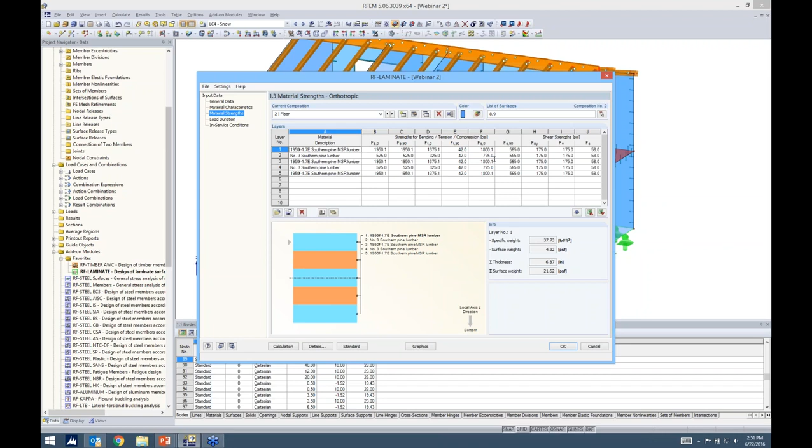And I just continue working down my list here. Material strengths looks very similar to material characteristics. It's just giving you your strengths for bending, tension, and compression based on what the code is telling us.

Load duration, this is just from our loads that we've already entered into RFEM. So you can see that everything's automatically linked here. Everything looks correct except for maybe wind, we want it more as 10 minutes for our load duration. Then the load combinations for ASCE are automatically updated with the correct load factor.

In service conditions, is your panel dry or wet? All of ours will be dry. And then you can click on the standard button here, and we get some other factors that are applicable to our strengths, our capacities.

What's nice too is that we have all the references to the code here, so you never have to guess, well, I don't remember where load duration comes from in the code. We give the reference right here, so you can flip open to the code and take a look at that.

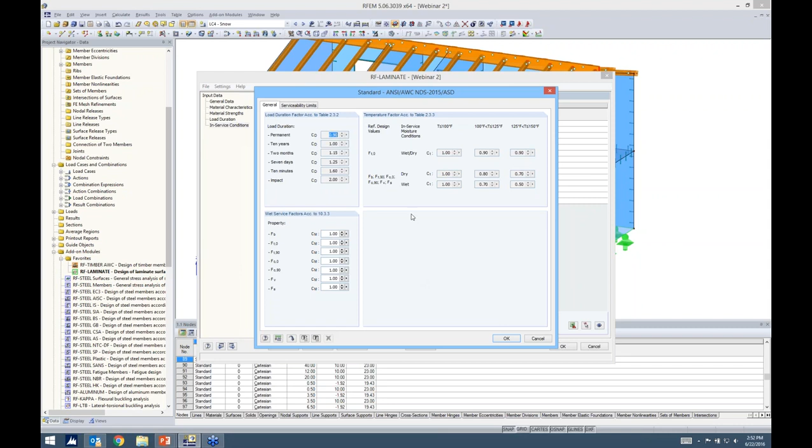With that said, I would go ahead and run the calculation button now, but it takes a minute, so instead I'm just going to jump to a model that's already been solved. Let me pop open my RF-LAMINATE module. Like I said, this is the exact same model, I just have all my solution done right here.

So you can see here that now my results have popped up. My max stresses are given as a ratio by loading. We can see load combination 14, load combination 15, and so forth. You'll also notice that there's a stress check for every single bending, tension, compression. Every check in the code that requires shear will all be listed here. That's one awesome thing about RFEM, is that we don't just give you the controlling ratio, we give you every single one, so you can really understand what all the different load checks are.

As we scroll through these, you'll notice that our diagram is changing for all of them. But let's say I'm really only interested in the max load check. Well, I can filter it according to the max here, and it jumps to the load combinations that are controlling. You'll also notice that if we go back to the full list, regardless, we get our max ratio listed right here. We have a nice green smiley face, so we're below 1.0.

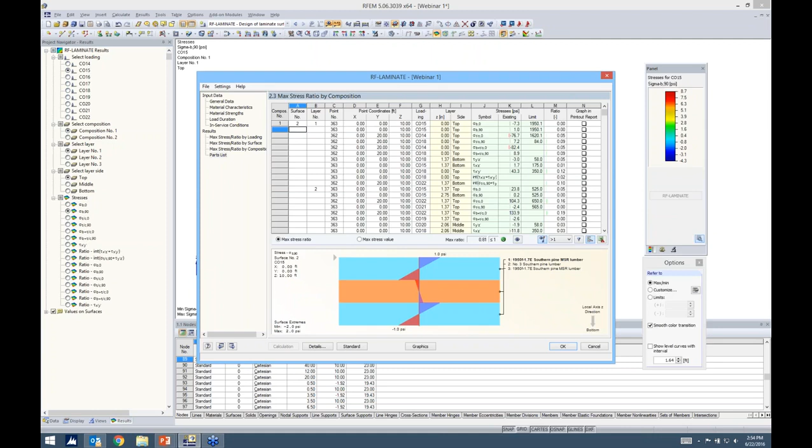These other options are basically just rearranging your results. This is according to surface, so now surface number 2 is listed here. And then we have composition, so our walls and our floor that we created. We also have our material takeoff here, which engineers might be interested in.

For their calculations and such, you can go ahead and put this report in there. So that is available in this module.

Now the other thing we can do is jump to our graphics, and you'll notice our results bar is here now, and we can view all of the different stresses. Although we had it in table form, maybe we want to see it graphically. So we have all of our stresses here that we can view. We have composition 1, which is our walls, and we can jump to composition 2, which is our floors. Very powerful in terms of the graphics as well.

And then we can even view our ratios as contour lines as well. You'll notice everything's blue because we're well below 1.0. If things were closer to failing, it would be closer to that red color.

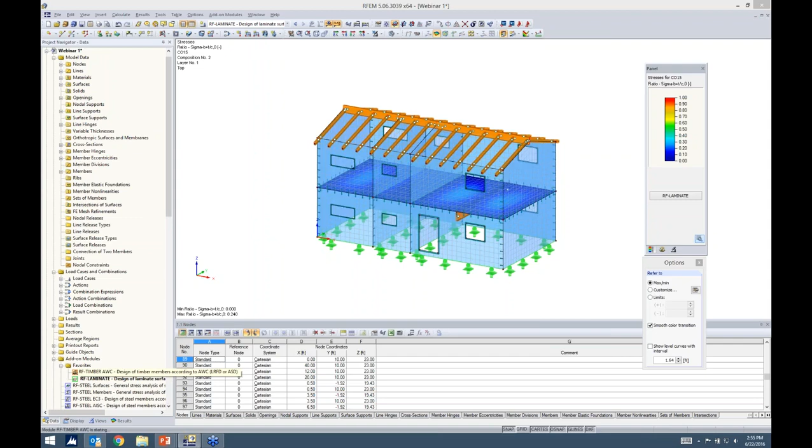Okay, with that said, now I am going to jump into the Timber AWC module. Lucky for us, the module looks almost identical to the CLT. This is pretty much the case for all of our add-on modules. So when you're opening up, whether it's dynamics, steel, or timber, all of them look very similar. There's no need to learn all the different modules. It's going to be intuitive no matter which one you're in.

You can see here that we can choose design according to ASD or LRFD. I'll go ahead and choose ASD. I have my members just checked as all now. We can also do member sets so that we create a design where all the members are maybe optimized to the same size. So quite a few options there.

This is similar to what's in our steel module, our concrete module. Now for the actual design load combinations, because I'm running ASD, I want to choose my ASD load combinations for my design. Serviceability, same thing as CLT.

If we wanted to take a look at maybe some deflections, I guess it's not in there. If we want to take a look at some of our deflection limitations, we can go ahead and choose that for serviceability as well. Fire resistance, we also have the ability to do fire resistance design. Again, you would want to choose the applicable load combinations here, and we would get a few more options for fire resistance.

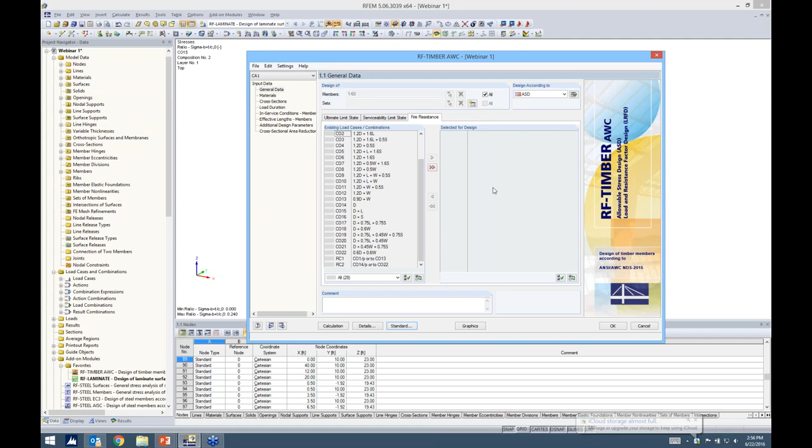Moving down the list to materials, you can see that concrete and steel are bright red. This makes sense, we can't design a concrete or steel beam in a timber add-on module, so those are not applicable. But you can see our timber materials are applicable. Laminate is not, because we need to use the laminate module. Cross sections, same thing - if we had steel or concrete in here, it would be red as well.

Now you can choose to optimize these members. Let's say we're well below 1, or maybe we're above 1, we can optimize. We get that question quite a bit, and that's certainly an option in these add-on modules. So you can optimize from the current row, which means it will choose one of the glulam Western species, or we can choose from our USA favorites list that I showed you before.

Load duration, this is the same thing as CLT. You can see here that our load cases were generated. We already have the load duration factors correct in here. In service conditions, dry and wet, pretty self-explanatory here.

Effective lengths - this is if you want to consider buckling, if we want to consider lateral torsional buckling, we need to come up with our L effective. So the default is the full member length, but if there are some connections in the program that will actually give you a shorter unbraced length, then we can go ahead and modify that here.

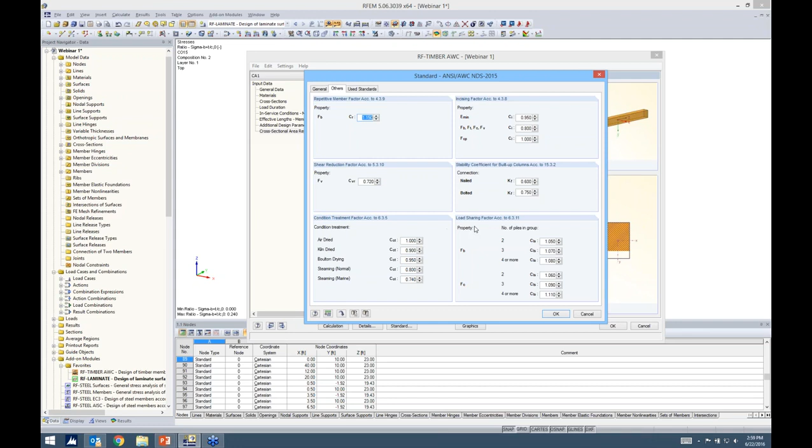If we click standard again, this gives us a lot more factors according to the NDS. We have all of the references here, and I think as far as our timber module, we're very strong. We offer a lot more factors compared to some other competitors, stability coefficients for built-up columns, shear reduction factors, load sharing, everything is pretty much available here.

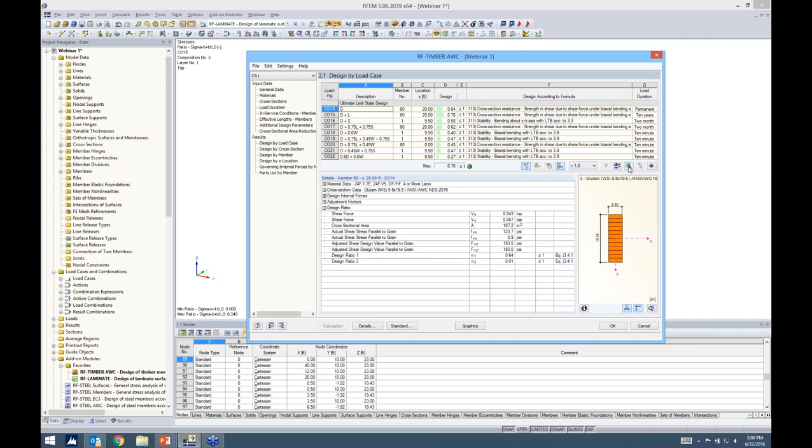All I need to do is go ahead and click the calculation button, and you'll notice I get my green smiley face. Again, just like CLT, I can filter if I want. Keep in mind that throughout the program we have direct links to Excel, so you don't need to worry about copying and pasting - we can use this button to directly integrate with it. We get the design according to the cross section.

Maybe more interesting would be the design by the particular member. Again, the program is so powerful that we give every single check and not just the controlling ratio. Even better, we give every single variable that's used. We list our cross-sectional data and internal forces that we're comparing it to. So we get very little tech support asking where these numbers came from, or why this code check is controlling over another - everything is listed here. It's very thorough, and then of course the takeoff ratio and parts list by members located at the end as well.

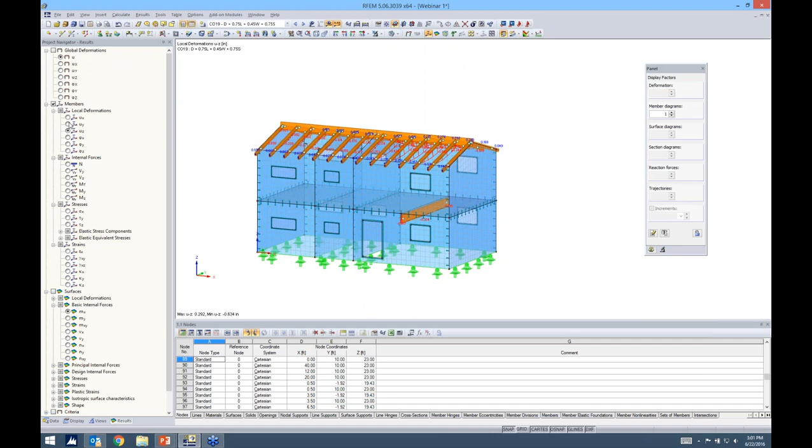We can view everything graphically. You'll notice for the NDS, we don't really have anything too much to show here other than the design ratio. But you can always switch back to one of these load cases in RFEM to show your results for these different members. We can show internal forces, which if I change this to wireframe, you'll be able to see a little bit better. So quite a few options in terms of running a timber analysis.

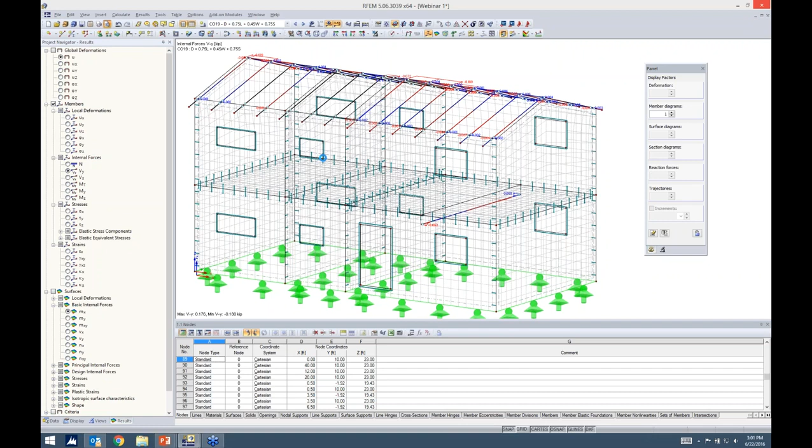Okay, one quick thing before we conclude the webinar - I just want to show you guys the printout report. Again, I think it's something that is quite powerful, especially in comparison to a lot of other printout reports that you have probably dealt with from other software competitors.

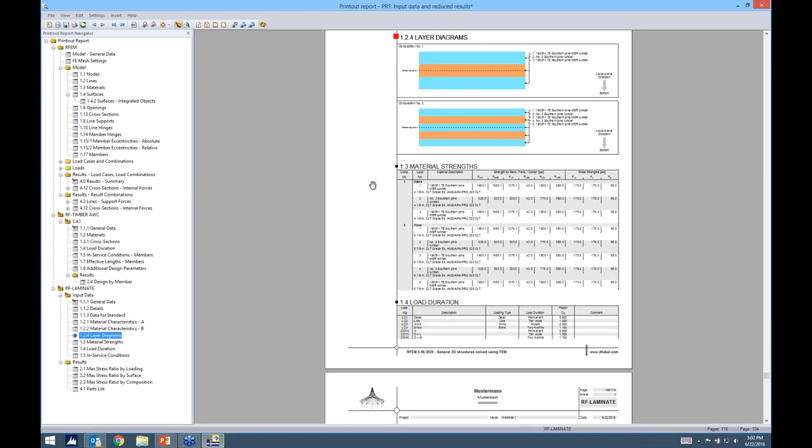You'll notice a completely separate application pops up, and here's our table of contents - let's say we want cross sections before line supports, we can just drag and drop and the program will automatically update that. But not only RFEM, we also have our add-on modules listed down here, RF-LAMINATE - everything was brought in from those add-on modules as well, including some layer diagrams. You can always add pictures in here, and if something were to change in your model, you don't have to worry about reprinting pictures - everything will be updated automatically. So everything's very synchronized within the program.